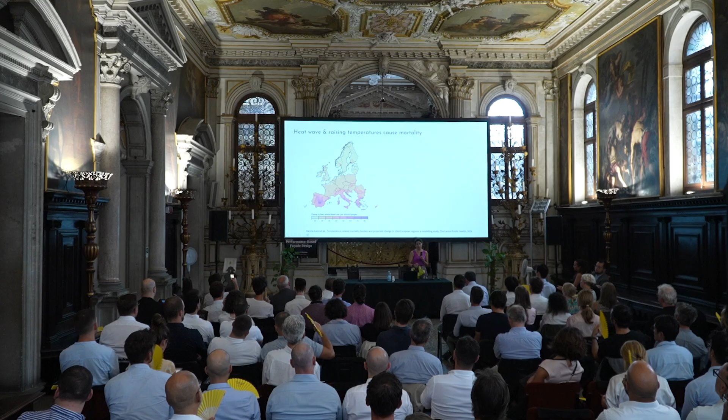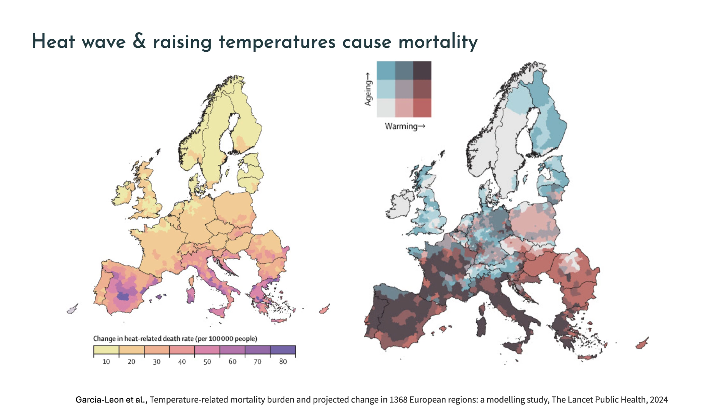And this death, of course, depends on your personal characteristics, and this is very interesting. Another map shows you how these deaths are distributed in Europe if we also cross-relate with the personal characteristics of the population. So, first reason: heat waves have a very strong impact on mortality and death.

But extreme heat also has a very important impact on our health and well-being, even if we manage not to die. Interestingly, extreme heat is something that has been studied from a physiology perspective a lot. We know very well how to measure and evaluate human resilience in an extreme heat environment in terms of physiological response, which is the first important part, since this affects our health very much.

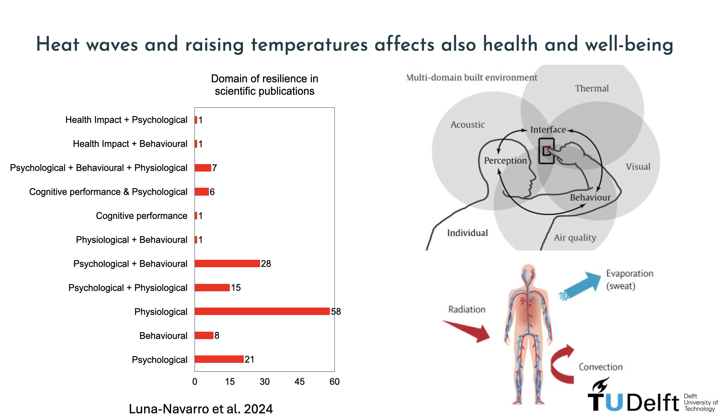But there is, of course, a very strong impact also on our psychological well-being, our behavioral response. Interestingly, we're doing a review to see how people are approaching this problem of how people respond in buildings to extreme heat. You can see already that physiology accounts for a very high number of papers, but when you look at the other two impacts, it's a bit more of an uncharted water situation, where we are still understanding how we can assess human response during extreme heat.

From a multi-domain perspective, for many of you used to working in seismic engineering or with other types of extreme events, resilience is not a new concept. When we approach a problem from a resilience perspective, what we are looking at—apologies, this reference is wrong, but we'll provide a new one, so it's not my graph—

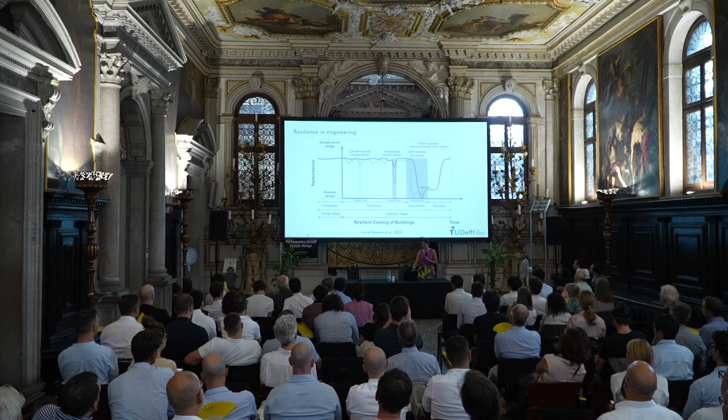When we're looking at resilience, what we consider is a performance level, and there is an extreme event, there is a loss in performance, and then a recovery phase where we will probably recover some of this performance. This loss in performance and the time needed to recover are very important when we assess the problem from a resilience perspective.

And this creates a very big difference between approaching the problem of extreme heat from a comfort perspective versus an extreme event or resilience perspective. Because in comfort, what we always try to do is maximize satisfaction, while here we are not trying to maximize satisfaction, we are trying to resist, recover, and minimize losses. So also the thresholds of tolerance become higher.

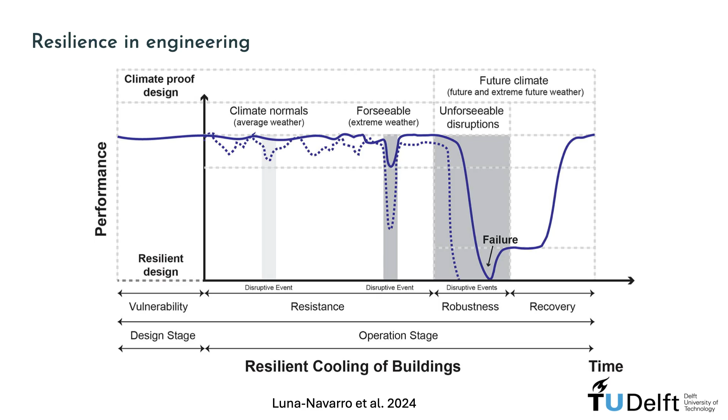If we translate this into a curve of people's response, it means that as the extreme heat event comes and temperatures rise, our thermal discomfort, physiological response, and psychological distress increases. There's a time we're in the middle of the heat wave, the temperature is high, gets steady, and then gets down, and we recover. So we could apply this to people.

You already see how important it is to have a temporal understanding of this phenomenon, because we want to look at how much time it takes to get to the maximum level of distress, how long we can stay in that distress, what are the consequences of staying in distress, and how long it takes to recover. So all aspects of the curve become important.

Interestingly, it's not a matter of avoiding exposure to heat, because people can adapt to this curve, in the sense that the more we expose people to heat, the more our capacity for adaptation increases, and our flexibility and resistance to extreme heat improves.

This is very similar to what happens in fitness. For those of you who are sporty, you know that when you start to run or do your sport, you increase your fitness. If you stop exercising, your fitness level decreases. But if you start to exercise again, your body remembers that it has been exercising. And for heat, it's very similar.

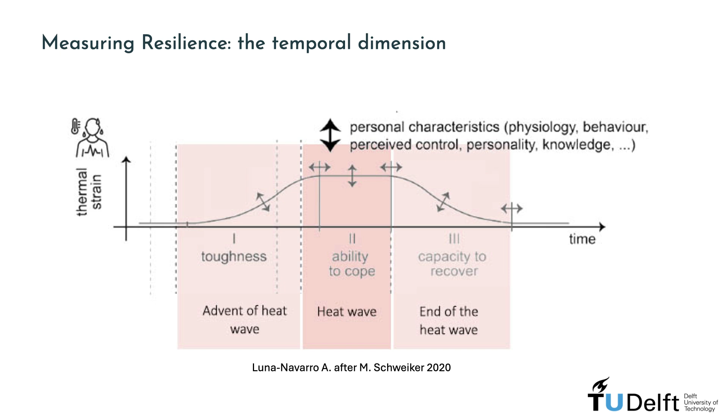But of course, we need to know what is the maximum safe temperature we can expose people to, and also how to help their adaptation.

So up to now, we have been looking at the people perspective. Usually in our assessment, we actually look at the building perspective, so we look at how high the temperature indoors is going to be.

What we will try to show in this presentation is what it takes to have a human-building perspective, where we want to combine both the personal response to an extreme heat event and the building characteristics, because they influence each other. The actual people in the building set the maximum safe temperature, but their behavior also impacts the performance of the building. So it's important we take both together.

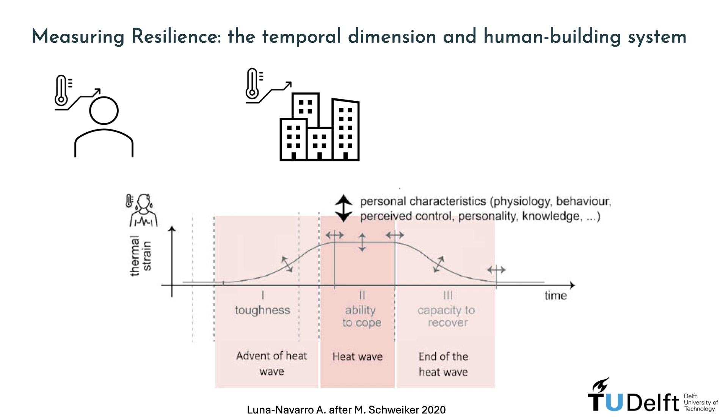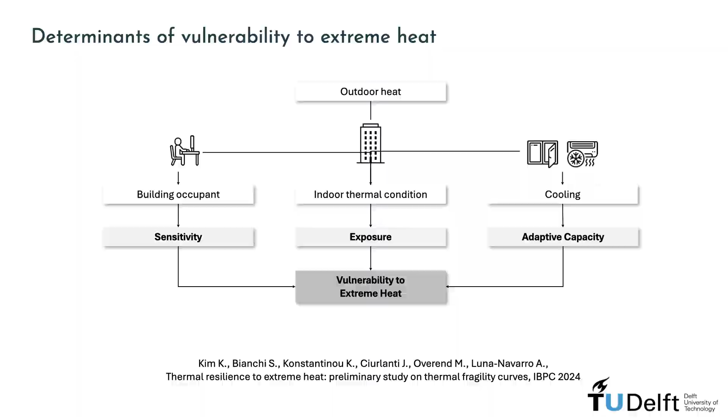So this means we can think of people as the sensitivity aspect that marks the threshold we can resist, and buildings as the exposure, the filter between outdoors and indoors — how much I'm going to expose people to, and to what condition. But how sensitive people are to that condition depends on individual characteristics. Then, as a building engineer, I can put in place different technologies to adapt and change the facade, which is our passion here, or the cooling system, or a combination of the two.

I would like now to briefly show you some preliminary evidence on why the type of weather file we're using makes a difference, the type of metric we use also plays a big role, and why we need to shift from deterministic to probabilistic approaches when we assess the resilience of facades and people to extreme heat.

So it means that even if we start from the design inputs of the weather files we can use nowadays in the design process, and morph them to follow the climatic projection of the IPCC, even then we have outdated data. But of course, the question we have in general is: what do we use for designing?

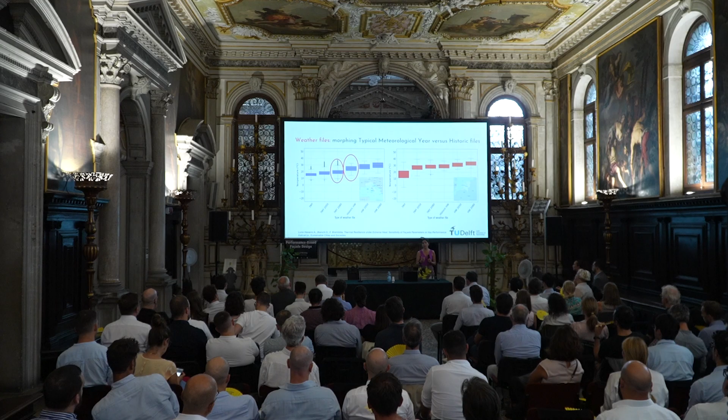Should we design with extreme data peaks, or do we still want some statistical representation of what a good future consideration is? This is very important, because if we only consider extreme peaks, we're going to oversize our system.

And because, as Ulrike explained very well, we are in a situation where resources are limited, we need to strike a balance between meeting an extreme event but not oversizing extremely. This trend, of course, is much more visible in Mediterranean countries, where extreme heat events are worse, but also in the Netherlands.

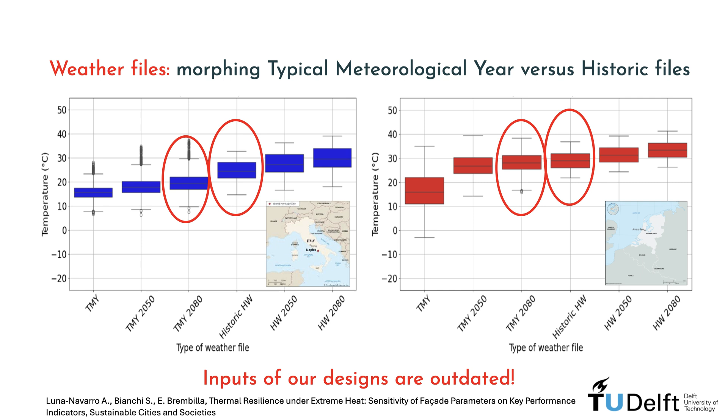How do we measure resilience? It's a matter of seeing the temporal evolution of air temperature, or measuring heart rate on people. What do we take as an indicator, and how this affects your design in the facade?

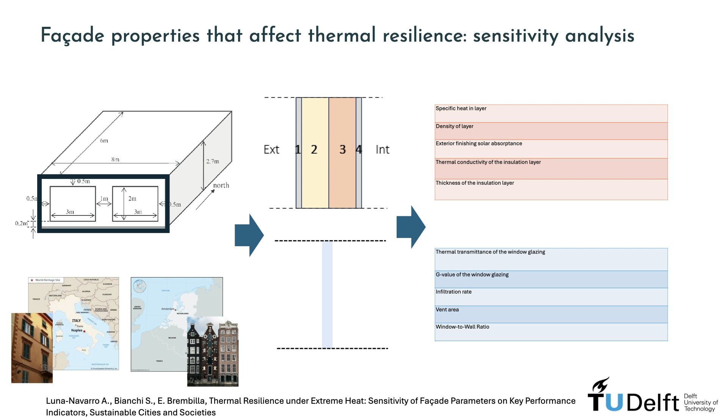So we did a sensitivity analysis where we considered a facade, and we tried to see 500 variations in properties, from heat, density of the layers, thermal conductivity, window-to-wall ratio, characteristics of the glazing, to look at two things: if changing the metric changes the final facade design, but also how important is the facade in responding to the extreme event.

So I go back to the first graph I showed you, where you see the temporal evolution during an extreme heat event, where we have a robustness period where the extreme heat event is picking up and you want to resist. Then the middle of the heat wave event where you want to resist, and the recovery phase.

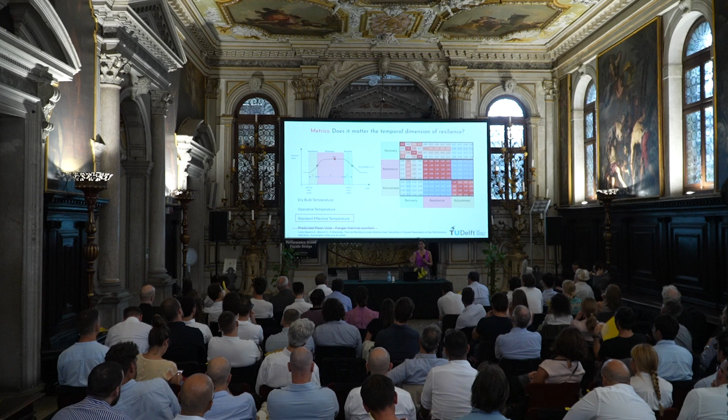I won't go into detail, but what I want to show with this matrix is the correlation between the different types of metrics, and the ones we can use to measure recovery, robustness, and resistance. You can see that recovery and resistance are quite correlated, robustness is inversely correlated, but more importantly, there is very low correlation between robustness metrics and recovery. This means that if we design a facade only considering one of these phases, we might end up with a different type of facade than if we consider another phase of the extreme event. So we need to consider all the different parts of the event, and then optimize toward an optimal solution, because these criteria may have competing requirements in terms of facade performance.

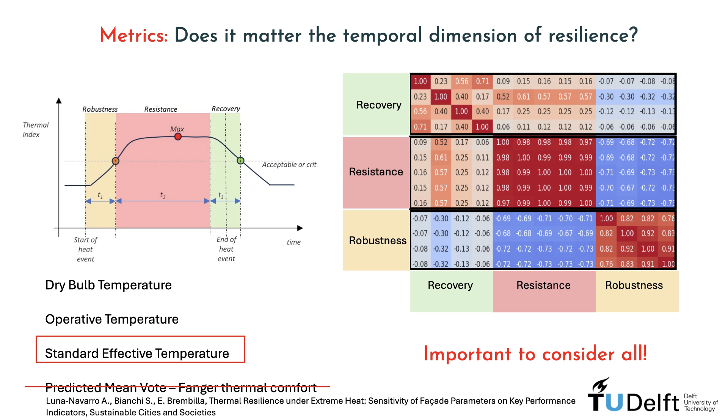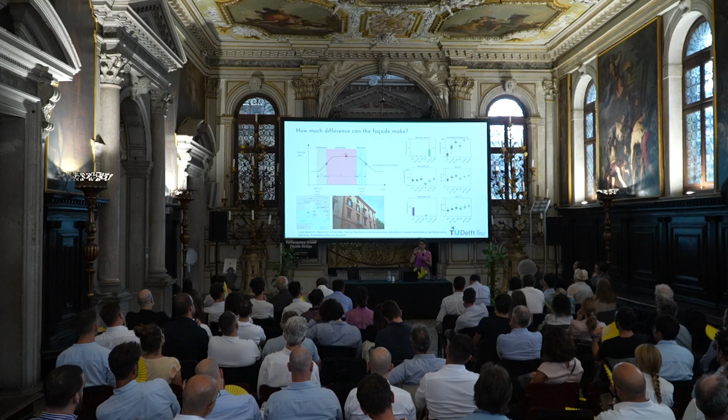And you see two tendencies that are interesting. One is that regardless of the metric, the more extreme the event, the lower the variance becomes, meaning that facades still play a role, but extreme events narrow down the impact of the variations. So it's still important to be in your optimal area. This also shows the difference between using design files depending on the metric, and then extreme weather events.

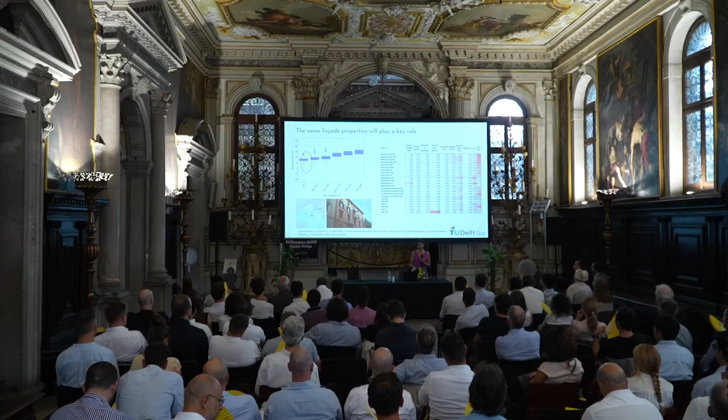Now, the question: what is the most important parameter in a facade in an extreme heat event? So the sensitivity analysis we did, I don't want to go into detail, but I'd be happy to explain later at coffee break. If we consider a facade that always has a level of insulation of at least 5 centimeters, you start to see that the parameters that play a very important role are G value, the glazing U value, the window-to-wall ratio, and the ventilation area.

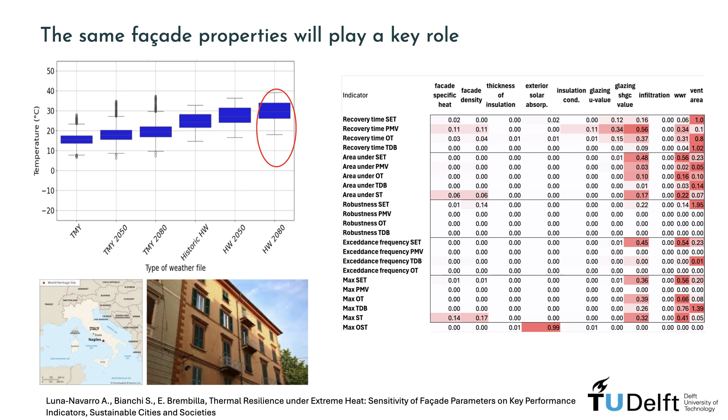I think we might have guessed this without the sensitivity analysis. What I think is interesting is that if we consider the typical meteorological year, which is the current input we're using for design, the weather files we're all currently using, versus an extreme event weather file built upon a projection later on, you see that even if some of the tendencies exacerbate, the trends are similar. So the parameters that impact the thermal performance of a facade are still the same. This is good news, meaning we are not starting from zero.

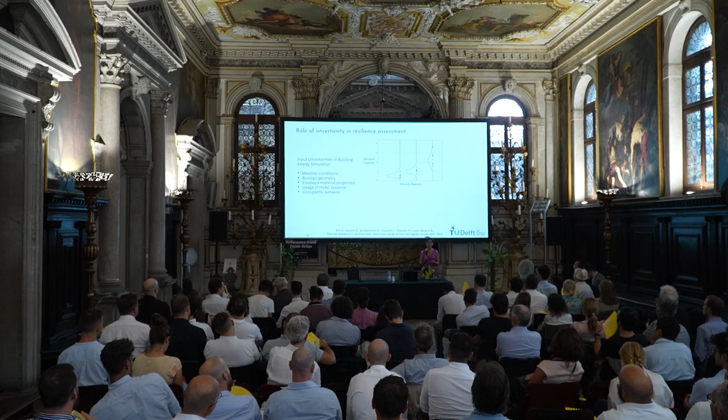Finally, the last thing I'd like to show is why it's important to move from a deterministic approach to a probabilistic one. There are uncertainties, as you know well, related to material properties, behavior of people, but also, as we saw before with the weather, the actual prediction of what the hazard will be, the event we are designing for. This means that considering one or two weather scenarios may lead us toward a wrong design. If we have a probabilistic approach, we can instead build a probability of response in our building, considering the probability of an event.

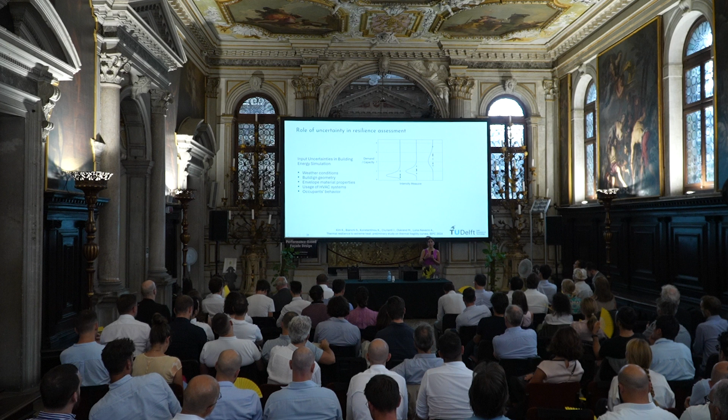So this means that I can consider different heat waves with different probability that will affect the building differently, so have a different probability of reaching my limit state, and I can build a fragility curve. This doesn't sound new at all for those working in structural engineering, but it was rarely applied to comfort.

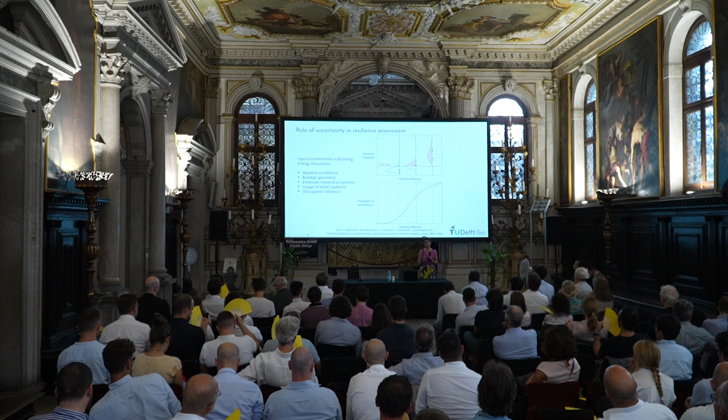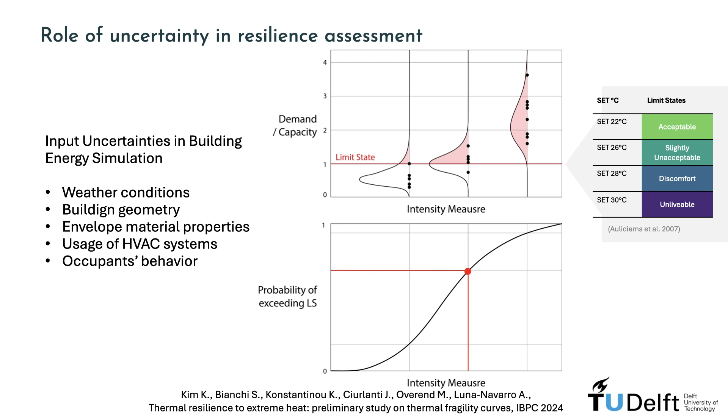What we're trying to do here is apply the concept of a fragility curve to the assessment of the performance of a facade and building in extreme heat. The question is, can I build a fragility curve that describes the response of my building, and even better, the people in the building, to an extreme heat event, by setting as a limit state a level of standard effective temperature that society decides is the benchmark of a safe temperature?

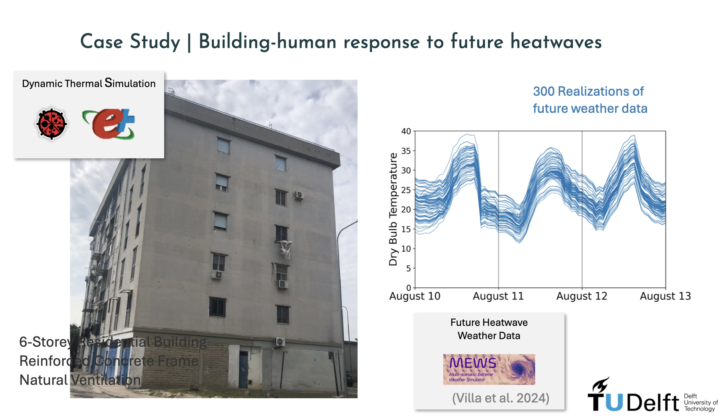The first step is to gather data, first on the hazard, then on the probability of response of the building. Differently than the first work I showed, I cannot take one weather file, one heat wave. I need to consider several heat waves and the probability of each heat wave happening in our country.

Then I can build a probability of a hazard happening. I can have a fragility curve that describes the response of the building to the probability of the hazard, and then calculate the losses.

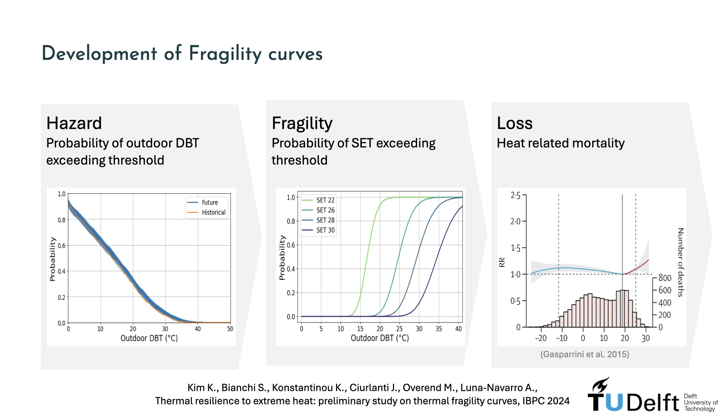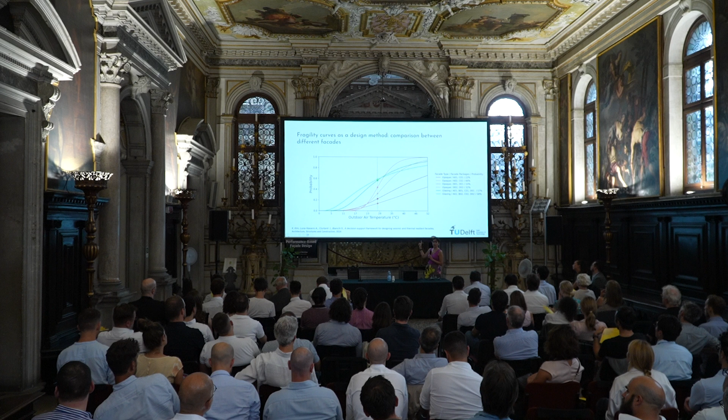So if we do this for different facades, we can compare them in terms of probability of exceeding our limit state. It may happen, like in this assessment we did, that different facades are ideal for some hazard intensity but not for others. This, I'm sure, sounds very familiar for people in seismic.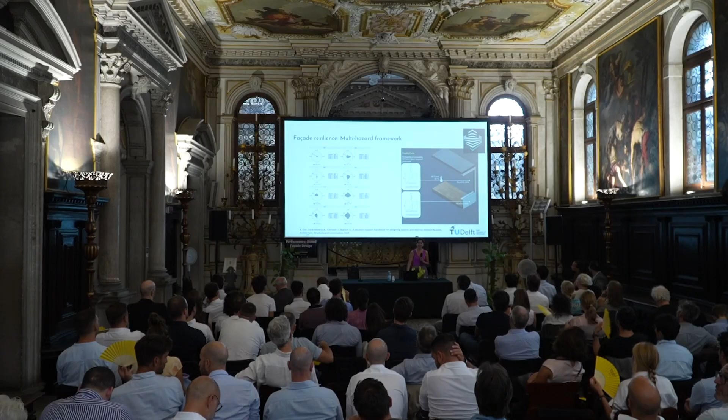But to conclude, the main take-home message: facade resilience to extreme heat requires a different approach than designing for thermal comfort. The type of metric and the weather inputs I use for my design have a major role in assessing the fragility, the vulnerability of your building.

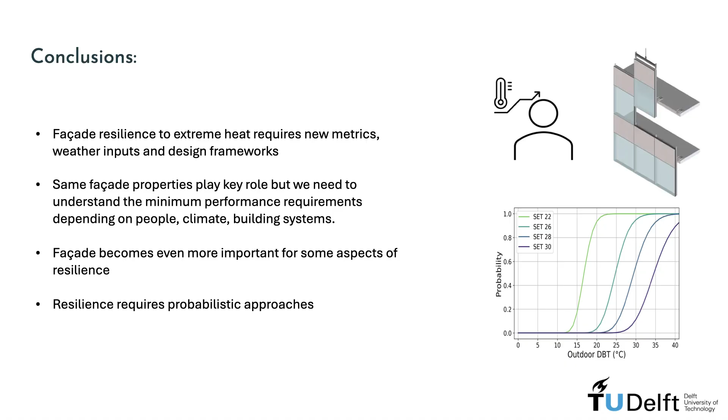The same facade properties we always design with play a key role—this isn't new for us—but it's very important to consider the temporal evolution during an extreme heat event. What is missing? A lot.

The main problem is that we don't know what the maximum safe temperature is, or the limits of resilience for each of us, because we are so different from one another. Designing for one standard person doesn't work anymore, because as you've seen from the first graph, mortality is really dependent on individual characteristics.

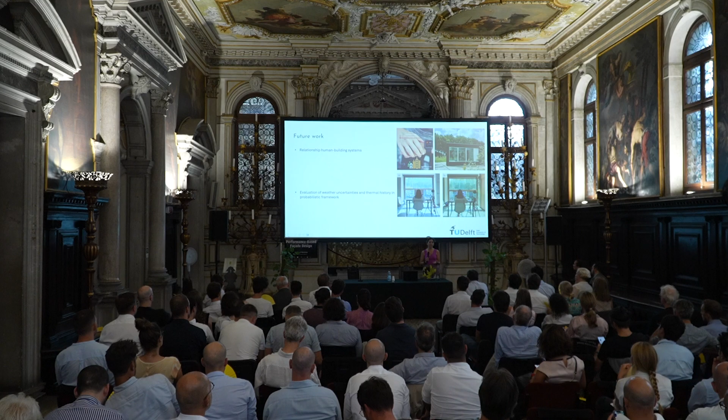Today I mainly showed simulation work we've done with my research collaborators, but we are actually working very hard on experimenting and gathering experimental data on people's response—either, like here, to different facade properties under extreme heat, or to different combinations in real buildings.

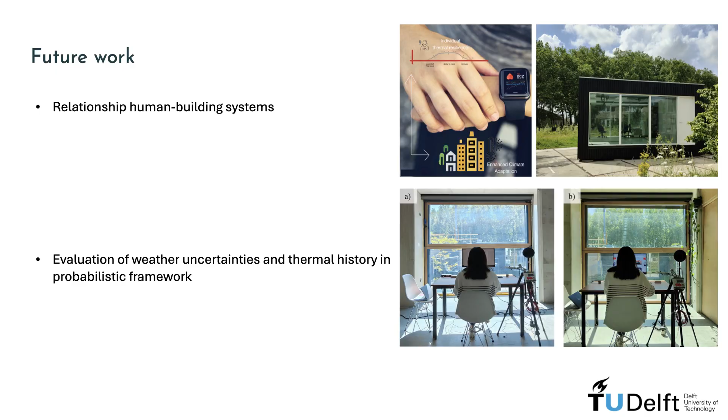This is an area where all our effort is required, because we need data to build the fragility curve, and the data isn't there. Altogether, we need to collect evidence of what is happening nowadays in heat waves in our buildings.